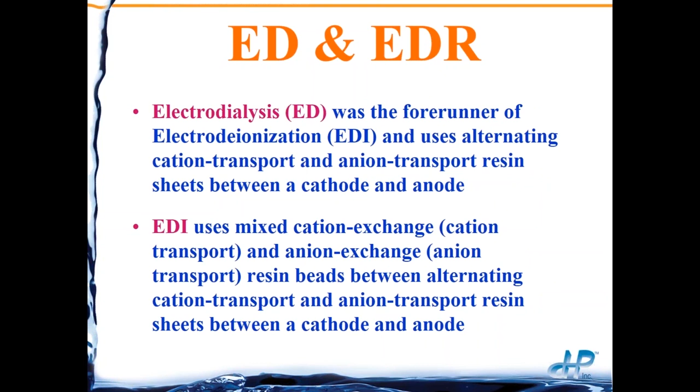I'm going to give just a real brief overview. This particular slide, don't worry about it. This is so that you have some words when you get the PDF and look at it tomorrow, or whenever you look at it.

I'm going to start with just electrodialysis, because electrodialysis is the predecessor, and it makes EDI a lot simpler to understand, I think, when you start off with electrodialysis. So EDI is going to be the next advancement over electrodialysis, and then Chris will be talking about fractional EDI, which is another step.

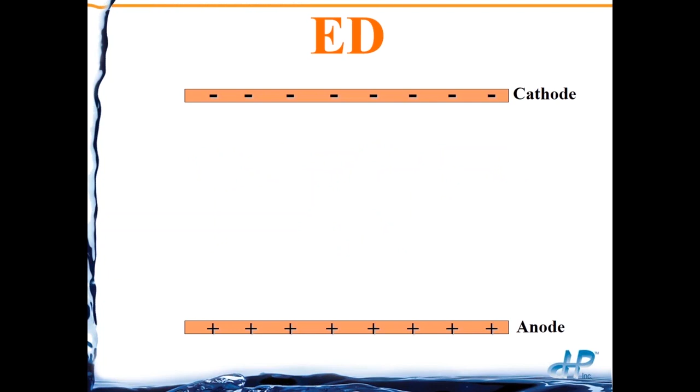Okay, so with ED, as we'll see with EDI as well, you have a cathode and an anode. This is direct current, so the cathode is always the cathode, the anode is always the anode. And then in between the two electrodes, we put cation transport and anion transport membrane sheets.

So for those of you familiar with ion exchange, a cation transport sheet would be made essentially out of strong acid cation resins embedded in a plastic matrix. And then the anion transport resin membranes would be made out of strong base anion resin embedded in a matrix. Water does not pass through these membranes, only the ions.

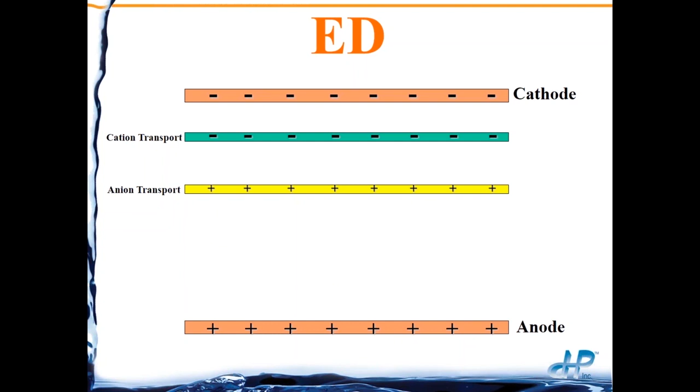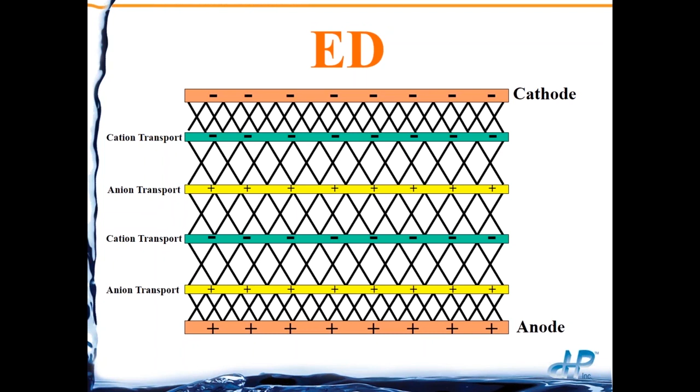So cation transport means that cations, which are positively charged ions, can pass through the membrane. Anions cannot. An anion transport membrane allows anions to go across it, but will not allow cations. So again, in between two electrodes, we have alternating sheets of cation and anion transport membranes. There are spacers in between these sheets that let the water get in between, but to keep the picture simple, I'm not going to put those spacers in.

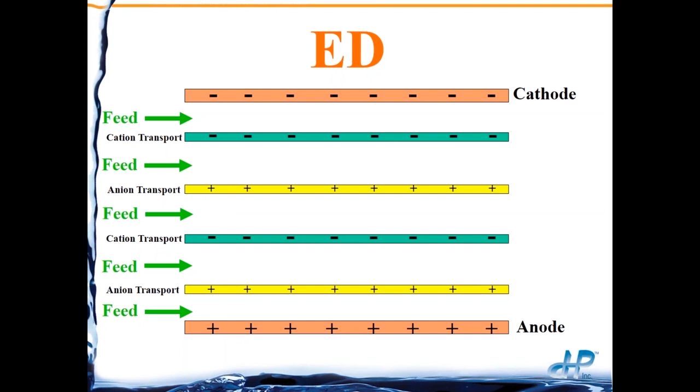So the feed water is going to enter between either the membrane sheets or the membrane sheet and electrode, and is going to pass from one end to the other. So in the feed water we have cations - here calcium, magnesium, and sodium. We have anions - sulfate, chloride, bicarbonate, and bisilicate or silica.

So the cations are going to be attracted to the cathode, and since we have a cation transport membrane sheet there, the cations can pass across the cation transport sheet, but then once it gets into this section, it cannot pass through an anion transport sheet, so now it's trapped. Same thing happens with the anions. The anions are attracted to the anode. They can pass through anion transport sheets, but they cannot pass through a cation transport sheet, so they're trapped in there.

So the channels where the ions leave, this is called the dilute stream. So this would be the feed stream on the left, and here we have the dilute stream, or the purified water, on the right. Where the ions are trapped, these are going to be called waste streams or concentrate streams. So this is how we're removing ions from water.

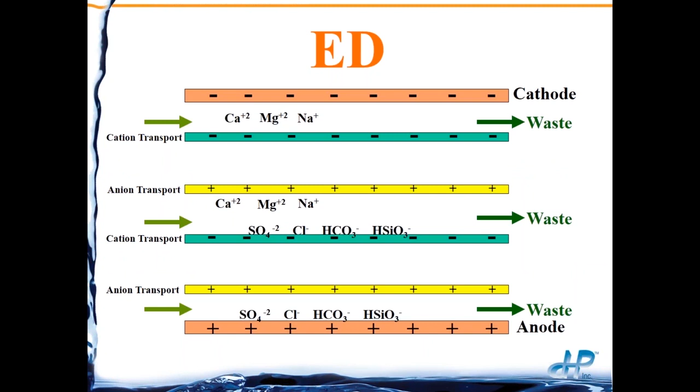So for drinking water or a lower purity water, that would work. But now EDI comes along, and it's a brilliant technology. But this is a high purity water technology now, and we'll see why.

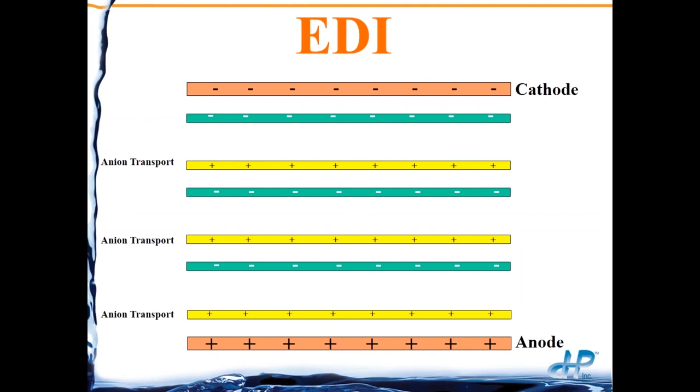But now this is a high purity water technology, because now when an ion comes in, so if it's a calcium, and the calcium comes into the strong acid cation, it now is going to transport very quickly, almost like electricity, boom, boom, boom. It's going to go from the functional group to the next functional group, across the membrane, and it's gone. So things happen very, very quickly, and you're able to get high purity water out of EDI where you could not get high purity water out of ED.

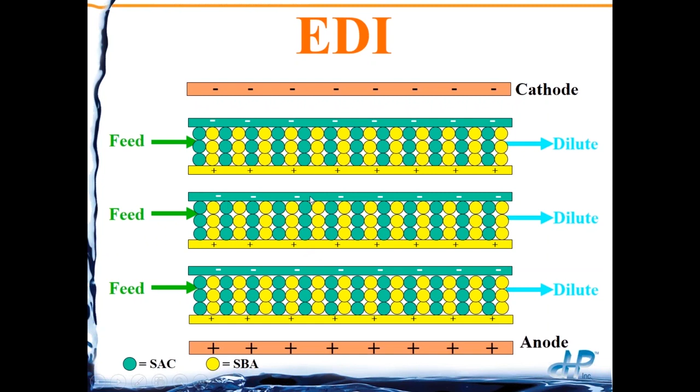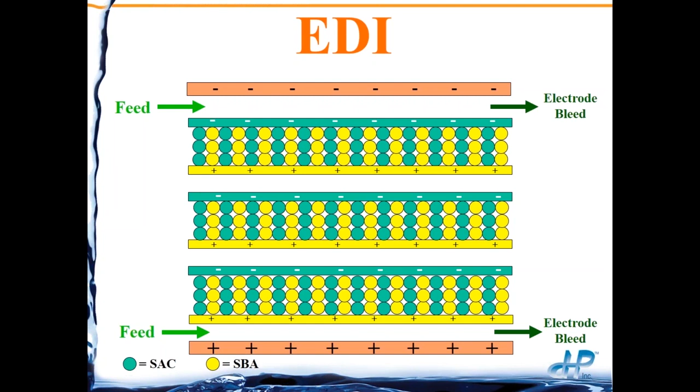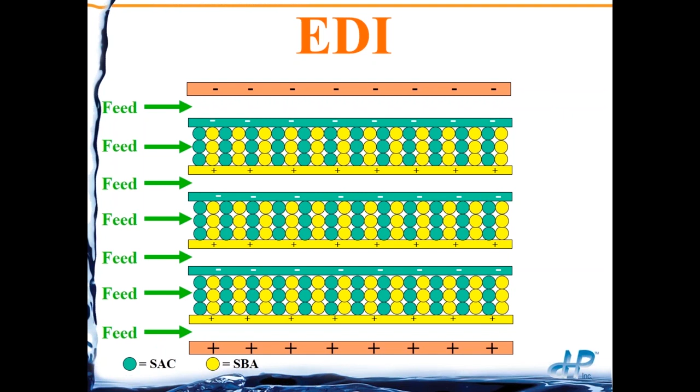So feed water, now we're talking RO permeate. Feed water is going to enter the mixed bed or the mixed resin portion. So what's going to come out is high purity water. Your ions are going to get trapped in the waste streams in between the membrane sheets, and we can call those concentrate streams, or we can call them waste streams. And then there are some special things that occur in the electrode bleed channel, a special situation we won't go into today. So basically RO permeate is going to go into all these channels, but we're going to end up with the high purity channel, the waste channel, and the electrode bleed channel.

But the real difference here, and the reason that we don't have to regenerate EDI units, is because once we start getting into this difficult area, then the electrical potential actually splits water molecules, H2O, into hydrogen and hydroxide, which is exactly what we regenerate strong acid cation beads with, which would be acid or hydrogen, and the strong base anion beads with hydroxide or caustic. So the water splitting only occurs at the locations where you have the strong acid cation and strong base anion beads or membranes touching each other.

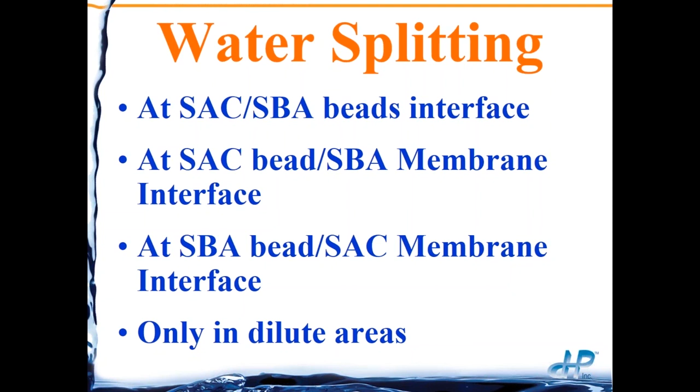And it's only in the dilute areas. You're not going to have this occurring in the front end. So in the dilute chamber, our goal is to have a small working bed. What that means is this is where all of your calciums and sulfates are easily removed. Most of your ions are easily removed out here. You want the biggest polishing bed that you can have. That gives you the highest purity water.

If you let your RO unit head south and it's making worse water, then that's probably going to make our EDI effluent not as high a purity. So if there's higher feed TDS, meaning the RO unit is not putting out as good a water, then we have a smaller polishing bed and the water isn't as good. Okay, so that's my quick rundown of how EDI works.

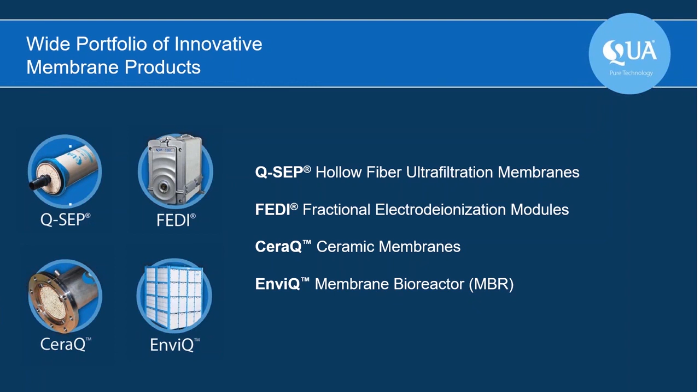So these are all, I'll say, advanced membrane technologies, but today we'll focus on the FEDI. So FEDI, with the FEDI technology, is the next generation of EDI, I can say.

We have a patented dual voltage process where we can control the voltage on the two different stages or regimes inside the EDI stack. That allows us to control removal of ions, and we can tolerate higher hardness in feed water than other EDI suppliers.

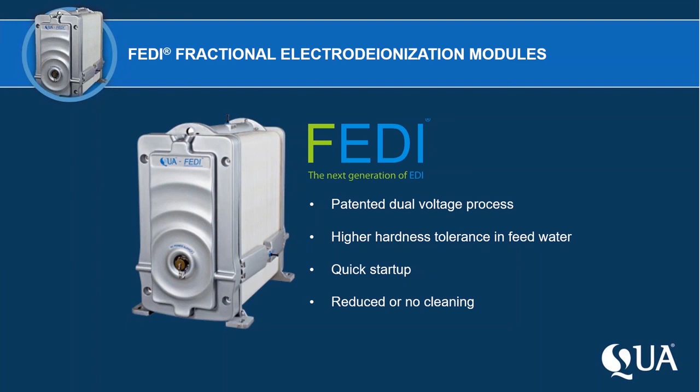It gives us a quick startup. It also helps reduce or gives us no cleaning. And we have a couple of case studies we'll look at.

As I mentioned, there are two different patents governing this EDI technology. One is for the process itself, and one is for preparing the ion exchange media.

The stack is also CE certified, which is really important these days since it's a global technology, and when you're working in the power industry or pharmaceutical industry, getting certification is very important. So we do have a CE certified EDI stack.

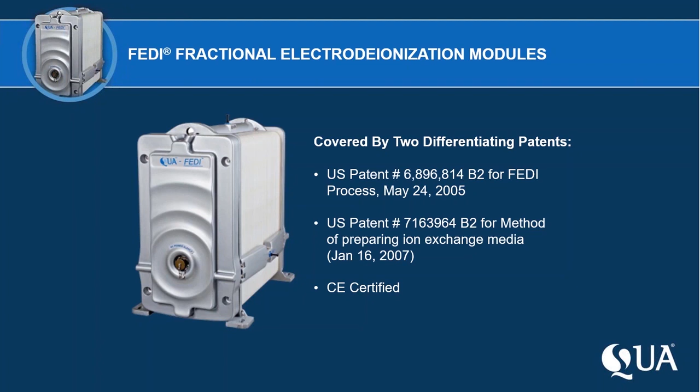So let's take a look at this. David talked a little bit about electrodialysis and how that evolved into EDI.

EDI did, I'll say, come from ED technology. And inside EDI, actually there is some ED principles taking place. It's a combination of chambers that are filled with ion exchange media or conductive filler.

We refer to it as a deionized water compartment. And you'll hear a lot of different names for the diluting compartment: deionized water compartment, purifying compartment. They're all analogous to each other.

And the same on the reject compartment or the concentrating compartment, or as David referred to it, the waste stream. So it's a combination of ion exchange resin media and ion exchange membranes.

And QUA's EDI stack does use ion selective membranes and a form of conductive filler or ion exchange media.

Now, the device itself needs a potential or a voltage. And all EDIs are governed by current efficiency. We won't get into too much of the details of current efficiency today, but it pretty much comes down

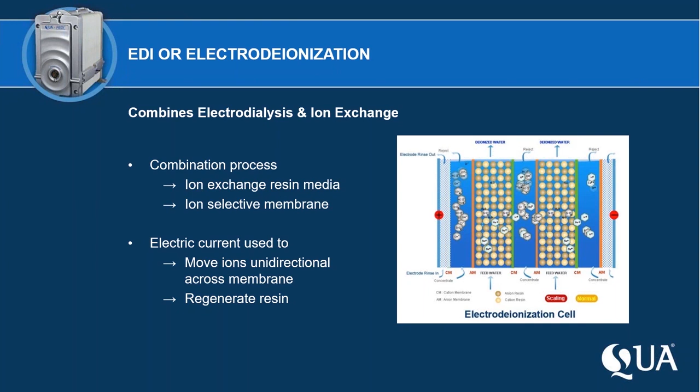So this is a typical EDI stack. Most EDI suppliers out there today will run EDI stacks with an upflow parallel configuration, running from the bottom upwards. One reason you do that is to remove any gases formed and to remove any bubbles or air in the system.

We've referred to the concentrate chambers. Typically it'd be a one pass or one flush through, same thing for the dilute. What we do is we refer to EDI stacks with cell pairs, and the cell pair comprises a diluting compartment and a concentrating compartment. You have multiple cell pairs, typically in a plate and frame device that are all held together.

Now on each end, as David alluded to, we have an anode and a cathode. Most EDI suppliers control or have an electrode flow, which is the water that flows through your nodes, anode and cathode, and then leaves the stack. The second stream would be the concentrate compartment, and then you have a product.

So some EDI suppliers today actually combine the concentrate and the electrode streams, so they have only two different streams entering and leaving the EDI device. There's pros and cons to that, and we'll get around to them.

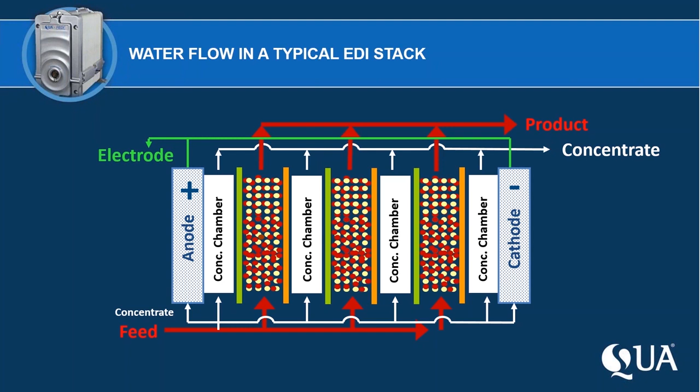So what differentiates the FEDI, the fractional EDI, from the traditional or some of the older EDIs out there is it's an advanced two-stage process. What I mean by that is this two-stage process happens in all EDI devices, where you have a working zone that removes strongly ionized species, and then you have a polishing zone, as David referred to it, that actually removes some of the weakly ionized constituents, such as silica, CO2, and boron.

However, with the FEDI process, we can actually control it. We apply a voltage to each of these different zones or regimes, so we can control the current to run at a slightly higher current efficiency in one zone, so we do not split water. Then we can control the polishing zone, where we run at a lower current efficiency, where we want to split water, so the resin becomes regenerated, and you can ionize weakly ionized constituents.

The other beauty of this FEDI process, and the reason we can get higher hardness tolerance, is that we're running at these higher current efficiencies in this working zone, and we can actually take this reject off midway through the EDI stack and introduce a second concentrate flow or stream into the working zone.

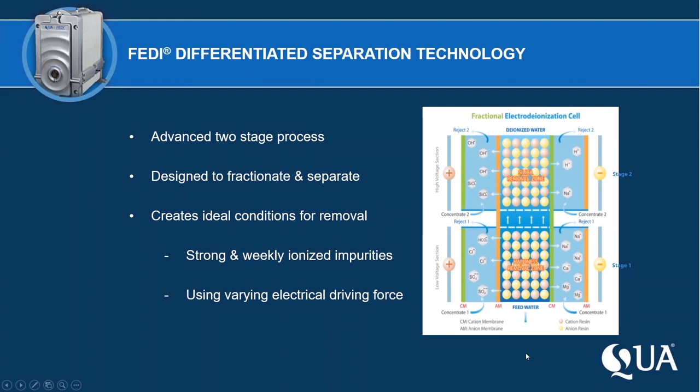So as I mentioned, the hardness removal zone, or the working zone, typically uses a lower electrical driving force. What that means is a higher current efficiency, so all the divalents, sodium chloride, and some of the monovalents are removed.

Also, the reject pH is acidic, which eliminates the scaling potential, again giving the FEDI a higher tolerance for these incoming divalents, and it prepares the weakly ionized impurities for stage 2 removal.

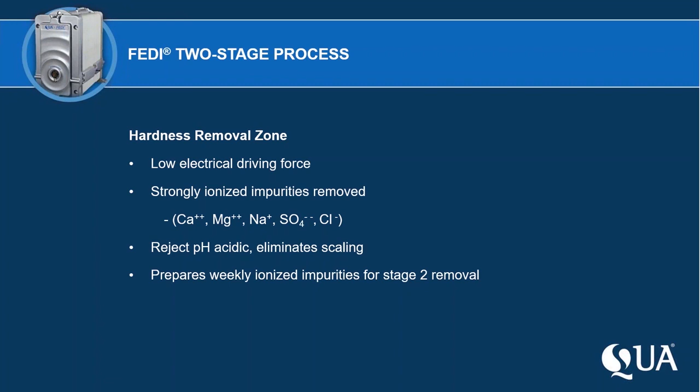So the silica removal zone runs at a higher electrical driving force, and this creates water splitting. We actually regenerate the resin in this polishing zone.

And when you regenerate the resin, it does a couple of things. One, the resin itself actually expands. When it goes from an exhausted state in a salt form to a hydrogen or hydroxyl state, it expands, and this gives very good packing density inside that compartment, which lowers the electrical resistance.

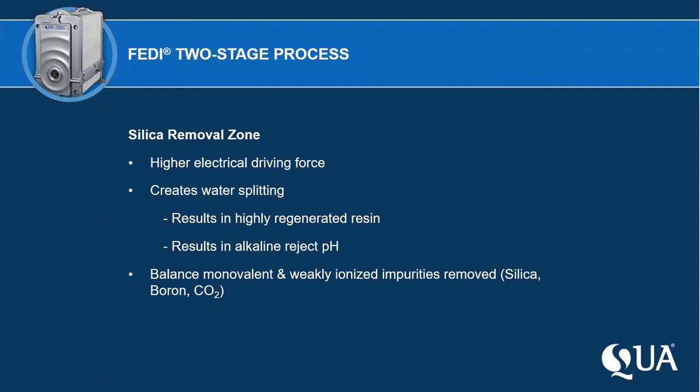When I refer to current efficiency, it's almost like looking at Ohm's law: E equals IR, and you want the stack to have low electrical resistance. So by the water splitting, you're getting a very compact, low electrical resistance zone. You can run at a higher current, get additional water splitting, and additional removal of impurities like silica, boron, and CO2.

And as David mentioned, electrodialysis came out in the 50s, I believe, and Ionics was one of the first to introduce it. It's one of the first technologies to purify water outside of filters, well before reverse osmosis or pressure membrane systems.

So ED's been around a long time, and it's always been a rough demineralizer — a very robust system using the same principles, but it would never be used in high purity water applications, because you'd never want it to split water, as that's what would cause scaling. You'd have these higher pH regimes mixing with some of your divalents, maybe with some alkalinity, and that's what forms scale. So the beauty of the FEDI is having these two distinct voltage and pH operating zones.

The working zone takes the primary load, while the regeneration zone handles the polishing.

One of the other things it does in that polishing zone is remove some ionic TOC. Now TOC, total oxidizable or total organic carbon, is kind of a catch-all — there are different molecular weights and different forms of TOC. But because the FEDI can control that zone, and we're polarizing more in that stage 2 zone, we can remove a lot of TOC. So depending on what that TOC is, we do get good rejection of organics.

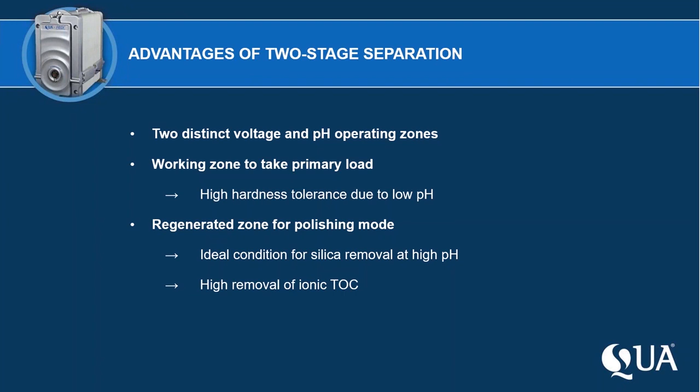So here's a side-by-side comparison.

So the traditional EDI on the left and the FEDI on the right. Now, to go back a little, some of the older legacy EDIs out there required salt injection and maybe even a recycle of your reject or concentrate. And that came from looking at velocities in the EDI, and also some EDIs had very high electrical resistance in their reject compartment, which required them to inject salt and actually do a reject recycle.

But over the years, it's been developed and known that the flow velocity isn't similar to a membrane process like an RO. Anyone skilled in designing RO systems knows you need a certain velocity in your reject or concentrate compartment so you don't form scale on the surface of the membrane. EDI is not a pressure membrane system. It is not a filter.

So it's been found over the years that having a higher velocity in the concentrate is not necessary, but having the right size or membrane distance in your reject compartment can certainly lower your electrical resistance. The closer the membranes, typically the lower the electrical resistance. So the FEDI stack is an optimal design of the reject — we do not need a reject recycle, and we do not need salt injection. Again, most devices out there today don't need it.

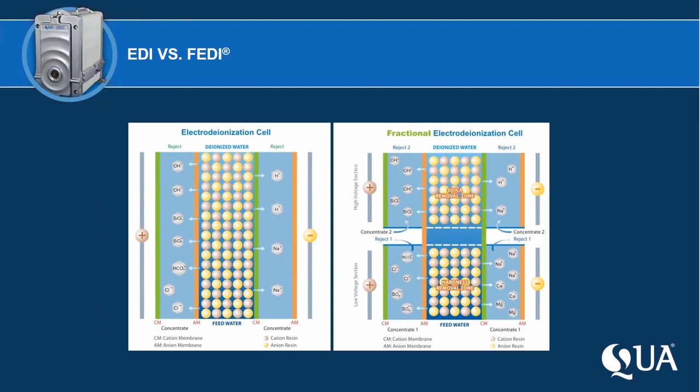So let's look at some of the applications for FEDI, very similar to what we see today from other EDI suppliers. We have the power industry, and the power industry is very concerned about silica. Anyone who's worked in that industry or designed systems for it typically looks at silica — they're very concerned about it because they have very tight silica specs.

They take water, turn it into steam, and use the steam to power turbines, then condense it down. They have a closed loop system — they recirculate their condensate back and turn it into steam again. One thing they can't afford is silica precipitating out in the turbines, because it reduces the life of the turbines and the power industry's components. So the power industry is concerned about silica.

We'll look at the pharmaceutical industry, and EDI was first accepted there. Millipore was probably the first to commercially introduce it. The beauty about EDI or FEDI technology in the pharmaceutical industry is it's not so much about the water product quality, because we're only looking for say 1 microsiemen, though the water it produces is well over that and approaches that 18 megohm holy grail type of water.

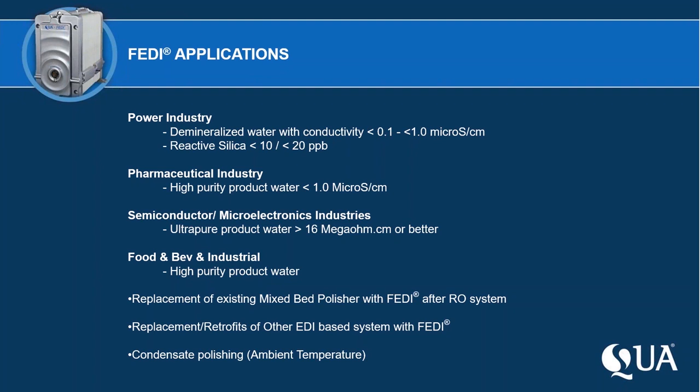As a lot of us know, the advantage of EDI—I won't get too much into it—FEDI, as well as other EDI devices out there today, replaces mixed bed. It's a chemical-free, very environmentally friendly device. You don't need acid and caustic. It replaces the mixed beds.

You don't need neutralization of the waste stream. You don't need any type of transportation of chemicals or waste off the site.

Most EDI, I know when it first came out, the price has dropped considerably over the past 20 years, where most of the payoff for an EDI, comparing it to a mixed bed, is well within one annual period. So if you're comparing or considering a mixed bed technology or a service DI type, certainly if you're looking over a 1 year or 12-month period, EDI is extremely cost competitive these days.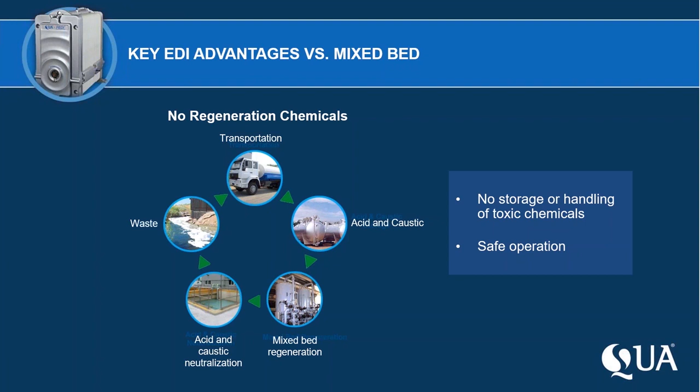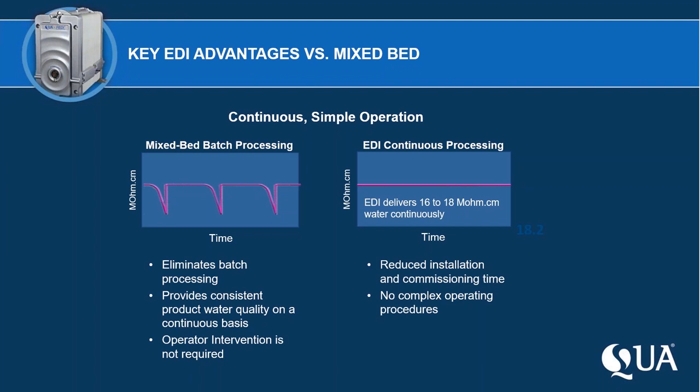It's a continuous process. It's very simple. It's been very simplified over the past few years. It gives you very consistent quality. I have a couple of graphs to show you some changes in feed water compared to the EDI product or FEDI product. It reduces installation costs, and some of this, anyone skilled in the art of EDI knows the benefits of it. So I'll move on to my next slide.

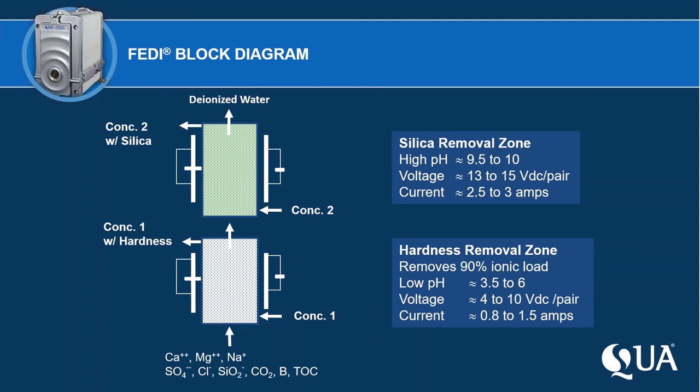So some technical specs for the FEDI stack. Again, it looks very similar maybe to some other products out there. We've kind of gone over this, the two zones on it. We have one conc in, one conc out. So it's a plate and frame device. Most plate and frame, some might have a circular design. It's still considered a plate and frame, I'll say.

We have a closing mechanism with two plates, almost looks like a heat exchanger, plate and frame heat exchanger. We have an anode, we have a cathode. As I mentioned earlier, the beauty of the dual voltage is we control both. The FEDI can also be used as a single voltage, where you can run one voltage and run it through as a standard, or some of the existing EDIs out there today.

We have multiple cell pairs in this plate and frame device, and one of the things that makes FEDI very robust is we don't need, some of the EDIs out there today use some type of O-rings to prevent leakage. The early EDI designs may need that because the big concerns of the EDI - and if anyone has been around as long as I know - some of the first EDIs out there were very prone to leaking or weeping, as the manufacturers would call it, or electrical shorting.

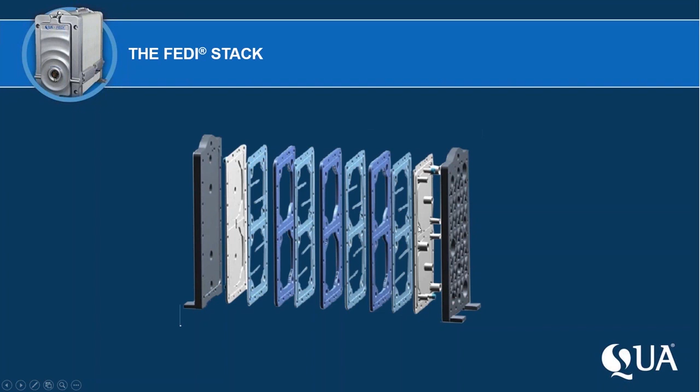The FEDI design actually uses a very unique process in manufacturing where our stack is almost snapped together, where we snap our diluting compartments and concentrating compartments, which is a little bit thinner than the diluting compartments. And we have multiple cell pairs like others out there. Depending upon the FEDI product you choose, there's different flow rates, and we normalize for a particular flow rate per cell pair. And there's so many cell pairs between this plate and frame device.

Some of the FEDI models: you'll see a FEDI 2 dual voltage for high hardness, does not require any type of salt injection. We can take up to 3 ppm of hardness, and I have some specs we'll show. We have the FEDI 2 single voltage, simply for lower hardness applications. Perhaps your RO is running on a softened feed, or you're using some type of higher reject membranes, so your calcium or hardness in your RO design is low enough. We can run it as a single voltage.

And then we have a unique thing where we can use the stack, and we call it a high flow operation, after a double pass RO. Many EDI suppliers today require double pass RO to get the product water from the EDI. So a lot of people will look at different products out there. Some people may claim to run at higher hardness levels, however they run at lower recovery modes, and we'll show the recovery in a minute. I got to the specs on it.

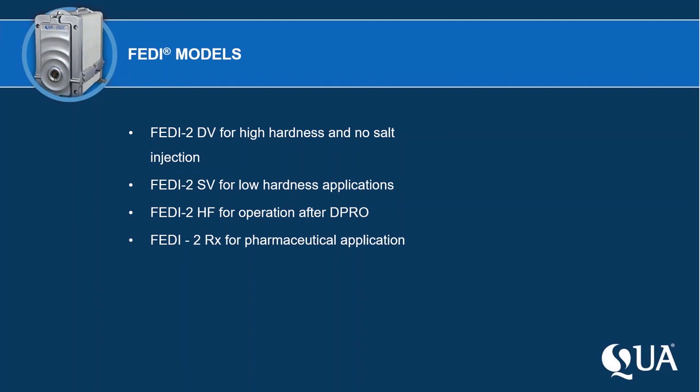And then we have a RX for pharmaceutical application, where we have heat sanitizable EDI, very popular in the pharmaceutical industry. The FDA likes to use heat to sanitize and kill bacteria. So heat sanitization is very popular in the pharmaceutical world.

We don't need any O-rings. Our system is extremely robust. We have a special spacer design to prevent leakage, and that means we don't need the O-rings. Again, less is more in manufacturing.

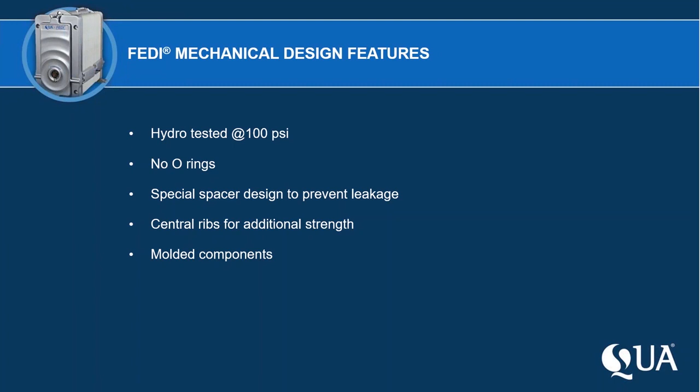We have central ribs which separate our two stages. These ribs provide additional strength. Some of the existing or legacy EDI out there, a lot of the problems in the past were maybe you'd get water hammer or overpressure, and you'd damage the EDI spacers - and you wouldn't just damage the EDI spacers, you'd move the resin around, which is something you don't want to do. So the additional strength in ours comes from central ribs that separate our two compartments. And all our compartments are molded. Again, because of the advancements of molding and polymers today, it's very easy to make a very consistent, reproducible, robust FEDI stack.

Some of the connections you'll see out there, ports, we have 1-inch NPTs. We like to use standard threads. You don't need any type of special connections or adapters to go from our stack to typical piping.

We have a 1/2 inch on the concentrate or reject compartment. And then we have an electrode rinse, as I mentioned.

The electrode rinse is very important because that's where some of the scale can start forming before it forms internally in the EDI components, the diluting and concentrating compartments. It can foul in your electrode rinse, and if you're not measuring it, you don't know that it's fouling. I've autopsied numerous stacks, and I know some suppliers have switched to an electrode rinse because the electrode would plug up, and if you weren't measuring it, you'd have a reduced flow in your electrode, which caused heat generation, gas formation, and catastrophic failure of the EDI stack. So I always think that an electrode rinse, and measuring and monitoring it, is extremely important in the EDI process.

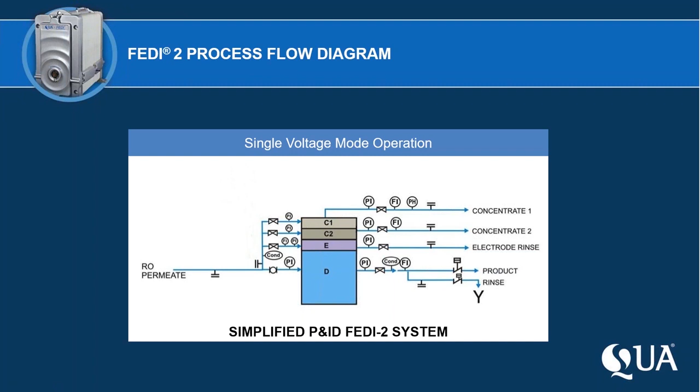the concentrate in both stage 1 and stage 2, so we have the reject from both. You can run in a single voltage mode by still controlling your concentrate in both compartments. And then we have the product. A lot of times it's recommended to do a rinse in case the EDI is shut down, to make sure you're within the specifications of the application. So a lot of times there might be a rinse just to get the product up to the quality that's required. So this is a single voltage high flow mode.

This is pretty cool. As you saw, we have the two stages where we control the concentrate. You can also control the dilute, or the deionization stream. You run one stream in, we split it off, and you decrease the residence time of your diluting, or the time the water's in the diluting compartment, by half. But you can get twice the flow from a FEDI stack by controlling both. So we have these two stages where we control the concentrate in both, we control the diluting or the deionization, and we actually control the voltage. All three

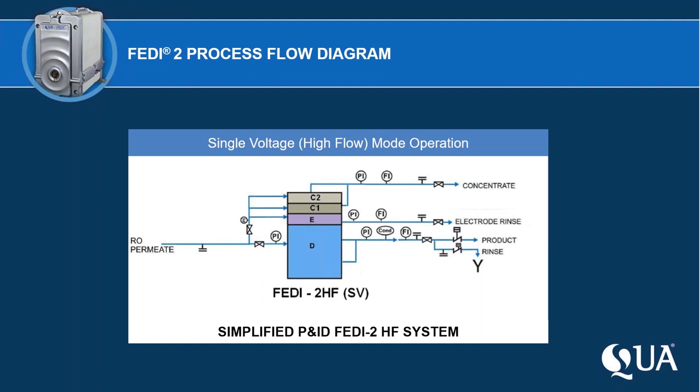help to make FEDI what it is today. So here's a dual voltage mode where we have the electrode, we have one diluting compartment, and we control the voltage on each stage.

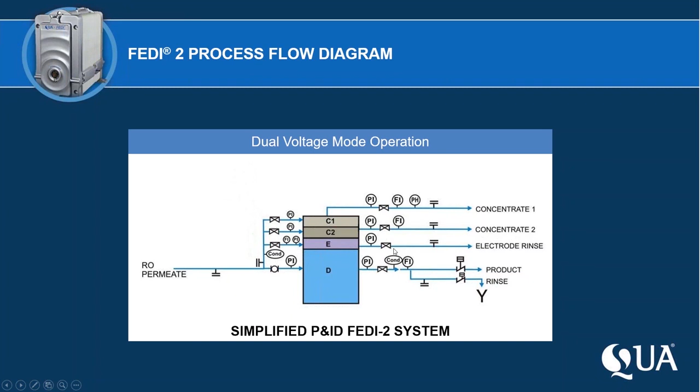Some of the typical operating parameters we look at: everyone looks at feed conductivity equivalents these days, which includes CO2. CO2 is one of those constituents in water that you certainly need to do a grab sample and measure, it depends upon alkalinity and pH of your system. We can take up to 1 ppm. Silica, total hardness as calcium carbonate, up to 3 ppm. Organics, 0.5 ppm. No one likes to see really any heavy metals in their system, so we keep that number very low. And then chlorine.

Chlorine is one of those things where all EDIs out there are affected by chlorine, and I'll add chloramines. Chloramines are used today in municipalities, and it's really caused an upset in a lot of designs out there because chloramines can't be removed in EDI, and the chlorine can oxidize the anion resin and irreversibly damage the EDI stack. So we definitely think chlorine and chloramine is probably one of the biggest problems you'll see in any type of EDI failure today, people not measuring or controlling their chloramine level or chlorine level. And even the RO membrane can become damaged. And the unfortunate thing is, I always look at EDI as

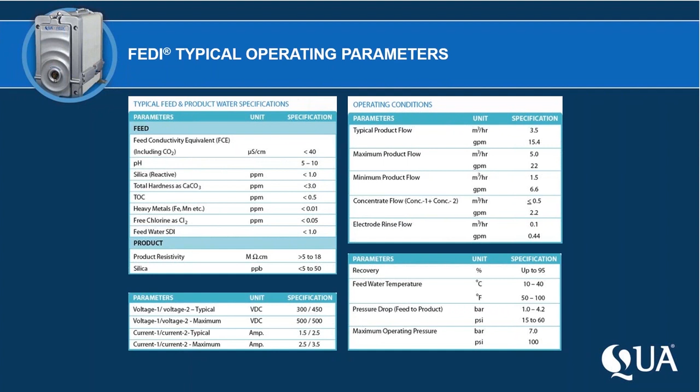Our pressure drops can range from 15 up to 60. Our pressure drop across the stack is closer to 40 or 50. So you always have a differential pressure between your inlet and outlet. And we can go up to 100 psi.

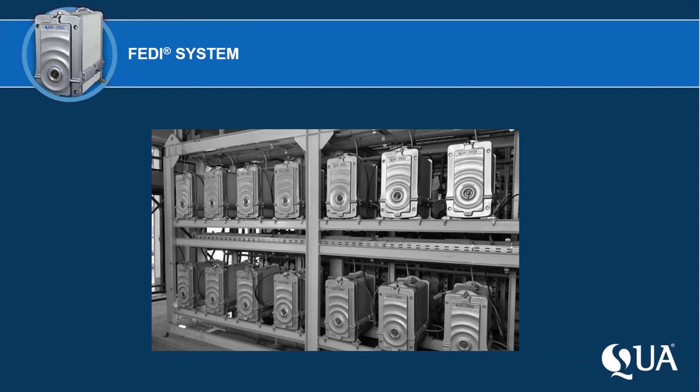Here's a nice picture of a FEDI installation. You can see, very simple, nice and clean, and that's what you like to see. Again, anyone skilled in the art of EDI knew there's some out there that could get quite convoluted with the piping and voltage and the power supplies and the piping. We like to, again, keep it very simple.

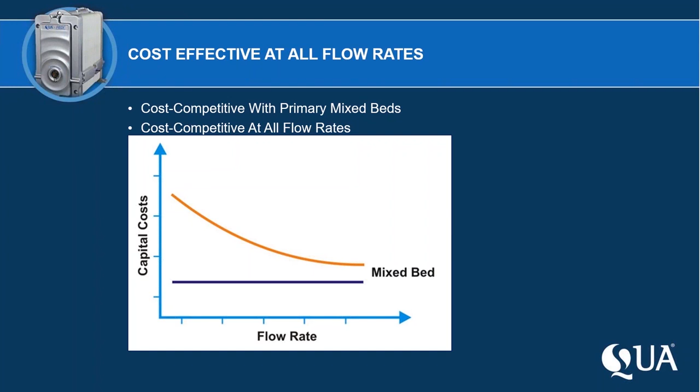When people ask about what's the payback on EDI or FEDI versus primary mixed beds, it always - as the flow rate gets higher, EDI or FEDI technology certainly becomes more cost competitive. So when you're running at a 5 or 10 gallon a minute type flow rate, payoff on that would be a little bit longer, but as you get to higher flow rates, your payoff definitely leans toward a FEDI type design.

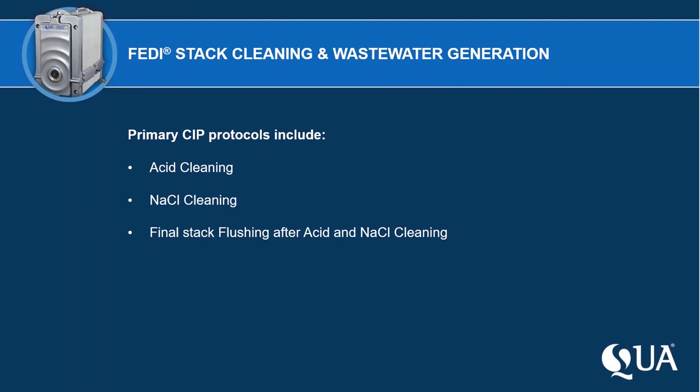CIP protocols, similar to others out there. Most of our stacks we don't require cleaning just because of our design. If needed, acid cleaning for any type of mineral deposits. And I find sodium chloride is actually very effective - it's probably one of the more effective options, and it's not a hazardous chemical. And then we always require flushing afterwards.

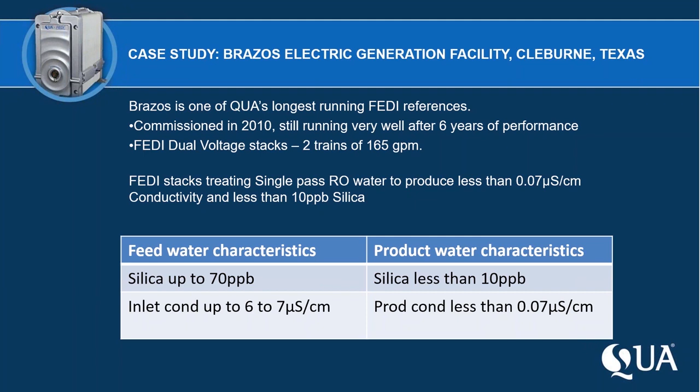Quick case study here, the Brazos electric plant. This is probably the longest running FEDI reference, over 6 years, 2 trains of 165 GPM each, running less than 10 ppb silica. We're running about 0.07 microsiemens, which is about 14 megohm.

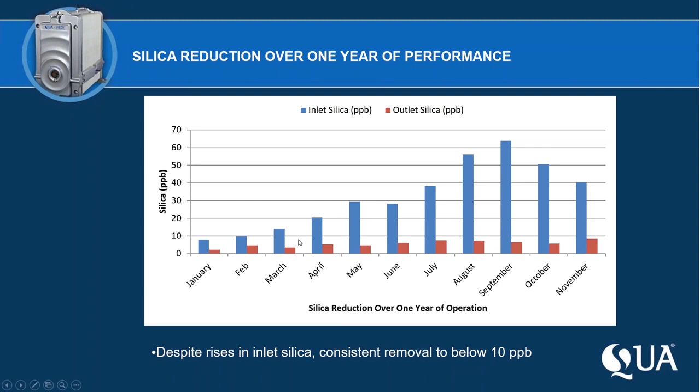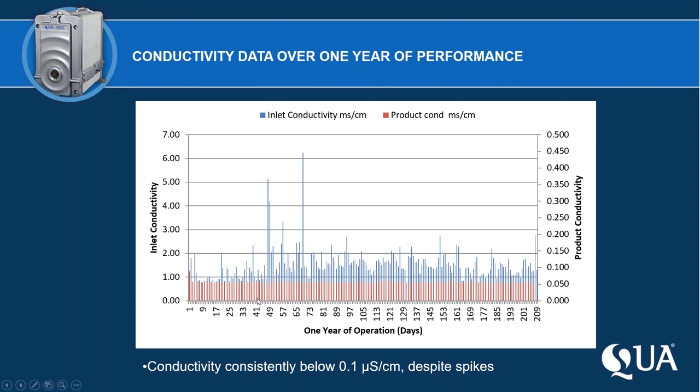Quick graph on silica - you can see our silica, a little silica fluctuation. This is over about a year period. Our feed silica changes, a little fluctuation, but you can see our product silica has actually stayed about the same - always under 10 ppb, about 14 megohm. Looking at conductivity, our conductivities have stayed the same, even though you see a fluctuation in the RO permeate, which could be due to startup and shutdown and changes in feed water. Despite these fluctuations, you see a very consistent line here of roughly 14 megohm product.

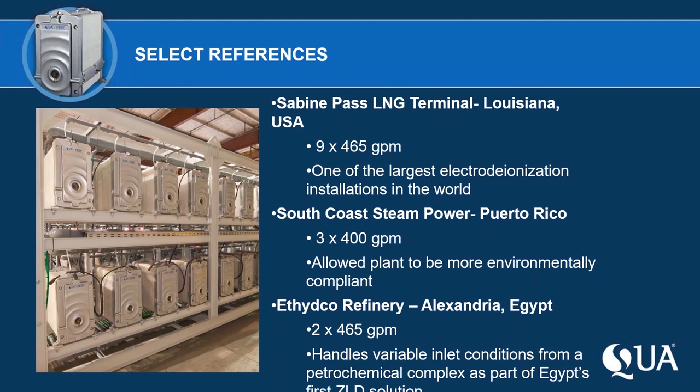A couple other select references. This is a single pass, very big - one of the largest EDI installations in the world. We have nine skids of 465 gallons a minute. South Coast Steam Power, Puerto Rico, 400 gallons a minute - allowed the plant to be very environmentally friendly, right, no chemicals. And another refinery out in Egypt handles variable inlet conditions. That's one of the things - you can have variable inlets on your RO permeate, your feed water changes, and the EDI is a great buffer to smooth that out.

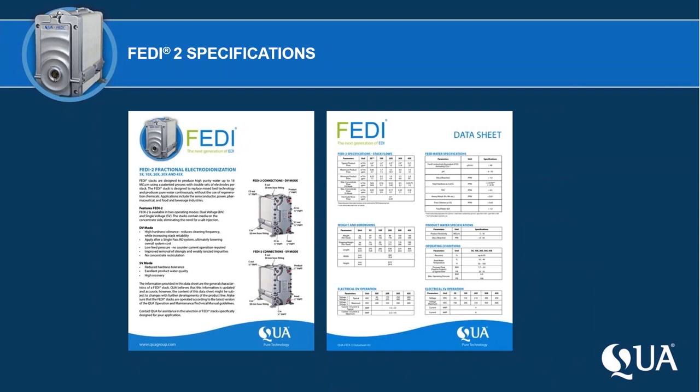Quick cut sheet. This is a FEDI 2 spec sheet. It's on our website, and you can certainly download it and get the details. It's a little difficult to read in the presentation.

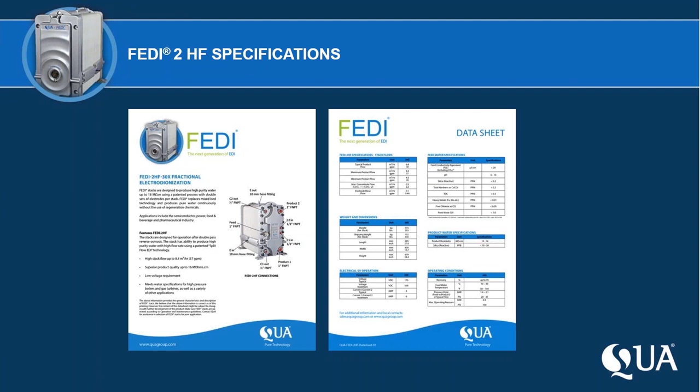And then we have the high flow, as I discussed. Very smart design here. We're running on a 2-pass RO. You can double your flow.

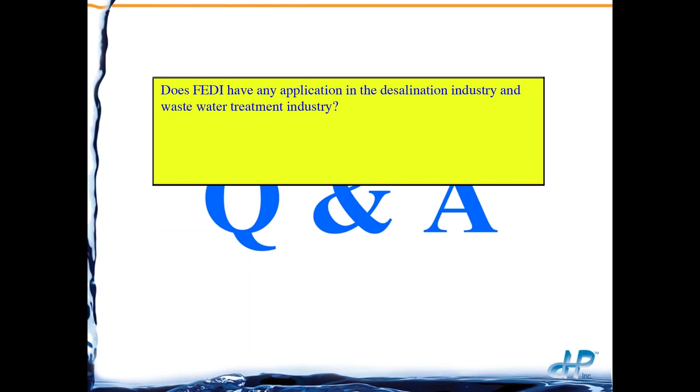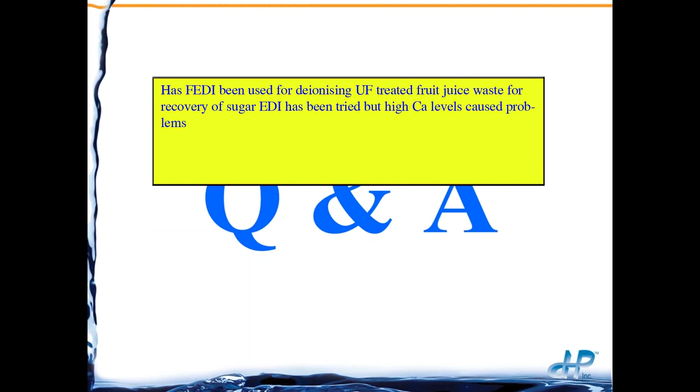Can FEDI voltages be controlled to enable selective ion removal? Yes, and that's the beauty of these two stages and having these two electrodes of dual voltage, where we can control the ion removal in either stage - primarily the first stage, because when you begin to split water it's a lot more difficult. But yes, we can control that ion removal in the first stage.

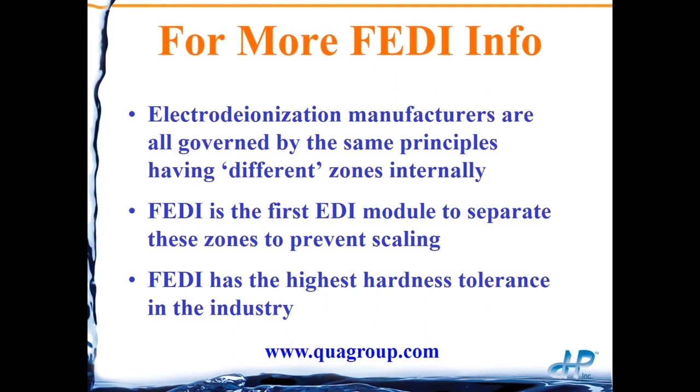Please talk about the cost differential between EDI and FEDI, capital and operating cost. If we look at the two, it's definitely dependent upon the application. If you're looking at a double pass RO design where we're using the high flow FEDI stack, we're extremely cost competitive to traditional EDI, and typically a lot better. Again, it depends upon flow rates and the application - starting with your water analysis, what you need to remove from the water and what you're trying to achieve is definitely dependent upon the design. So we'd have to design a power supply to accommodate whatever the application may be. But when it comes to a single voltage design, again, FEDI is very cost competitive. We understand the nature of the business, and because of some of the way the EDI stack's designed and manufactured, we're very cost competitive today. Another question?